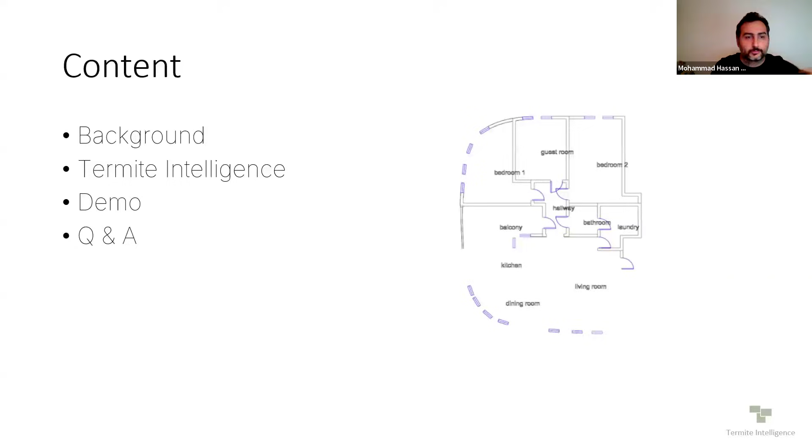I'm very happy to be here, it's a real pleasure to be part of this webinar. As I mentioned, the content goes through all these topics, so I'll start with who I am.

I'm a former computational designer and researcher. I started computational design during my master's degree, and I was working remotely with Houston and Cornell University. After a while, I became a computational designer and project director in the research and development group of a panel company in Tehran. Then I started my PhD in differential geometry and AI at Innsbruck University, which I'm now finalizing.

Termite was always alongside these paths. It started back in 2020, when we released the plugin for Grasshopper and held one workshop in CAADRIA. We got a lot of traction from the community, seeing that automation in layout generation is very interesting, not only for research and academia, but also for industry and for architects looking for a solution to the problem of repetitive work.

In 2022, we started more advanced technology development, separating the engine of Termite from the CAD software so it could become a hub connected to any software. We had an MVP release in 2023, got feedback from the community and some users, and had the chance to present our software at the Startup World Cup in Austria, where we were one of the finalists.

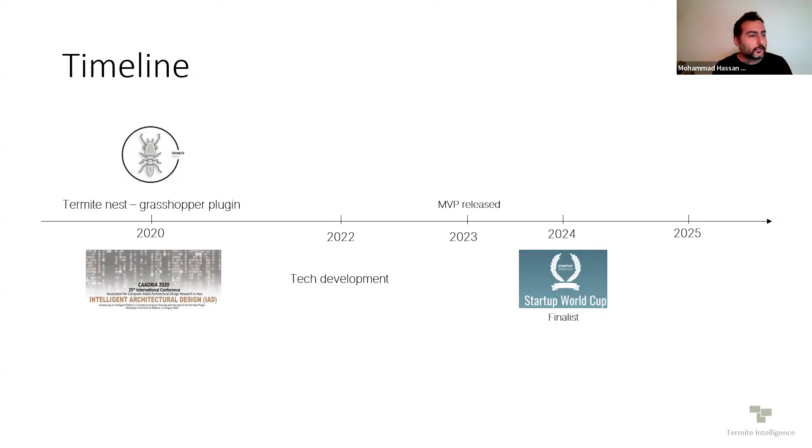Over this whole journey, we learned a lot from the community and tried to incorporate as much feedback as we could into the product. Now we have a dashboard powered by the AI engine we developed, which generates the layout and connects to Revit and Rhino. At the moment, it supports Rhino, Revit, and Grasshopper.

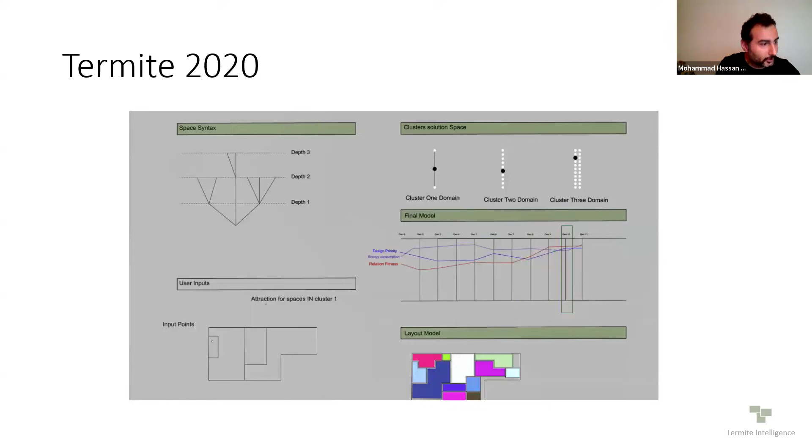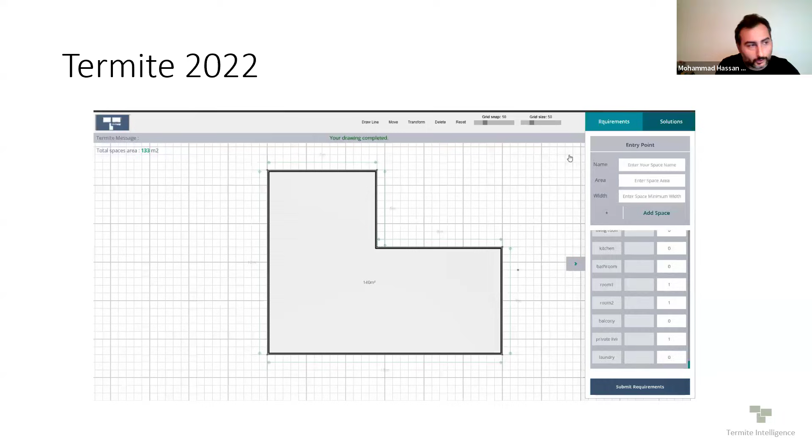Termite in 2020 was quite basic, working inside Rhino with Grasshopper. In 2022, we developed a small web app—it wasn't actually that small, but small compared to what we were aiming for. The issue was syncing with Rhino, since it was independent, making the connection between the CAD software a bit hard for users. We then started modifying and updating it, and now we have the dashboard that syncs with Rhino and Revit in real time.

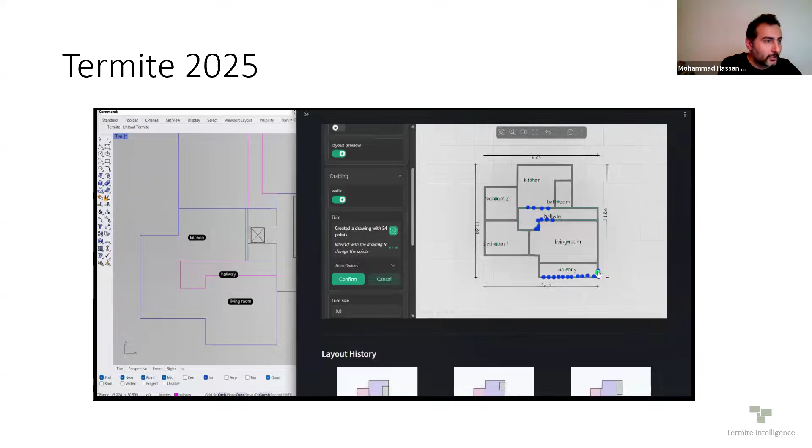You can update any data, and then you can create layouts and convert it to the plan and export it back. So that's the status that we have.

From food4Rhino, since 2020, we've had more than 6,000 downloads. We had a lot of great names from companies and users on the list, and we were very happy to see that the plugin has this traction rate, and how people are looking to have tools like that in their workflow.

From mid-October, when we had the first release of the new dashboard, in one of the webinars we got more than 200 on the waiting list. That is increasing exponentially, and we are very happy with that actually.

We'd love to expand at a faster rate so we can respond to all of them in shorter time. But we have started onboarding 5 companies at the moment, and we have a batch selection from the waiting list, and we will contact them as soon as we have the free resources to start onboarding.

But you can just go into our website and book a demo. You will receive automatically a meeting date, and then we will be happy to have a meeting with you, understand your needs, and then based on that, deliver the product to you.

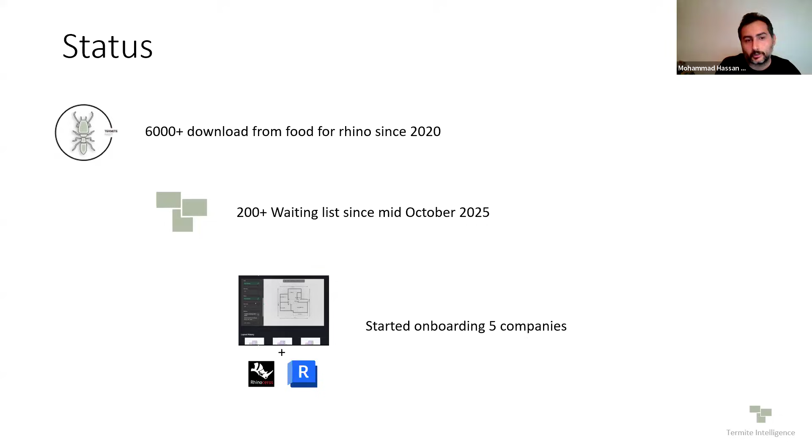The Termite dashboard at the moment has a workflow that's a session-based web app, and at the moment we have one session ready for delivery. I'll talk about the new sessions and what we have as a surprise for 2026 at the end of this webinar. This session works basically as an assistant that supports you in your design.

No matter if you're using Revit, Rhino, or Grasshopper, you can generate the boundary of the building. You use the template of the physical programs that you can sync with the dashboard, which I'm going to show you how it works. Then you decide where to put what space, and Termite converts that decision into a layout shape. Within the 3D viewer, you can convert it to the plan and then export it as a DWG, or sync it with Revit as a BIM model, or have an IFC export.

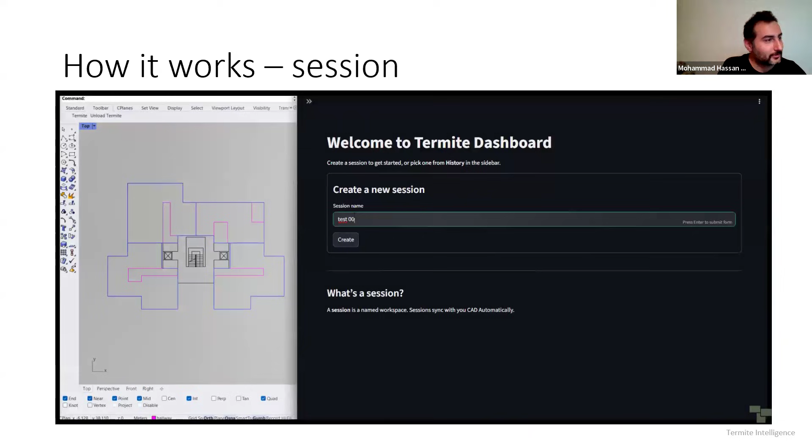Shortening the talk now, showing more about how it works. As I mentioned, the session is some sort of a workspace that you have. The first step in any session is the physical program.

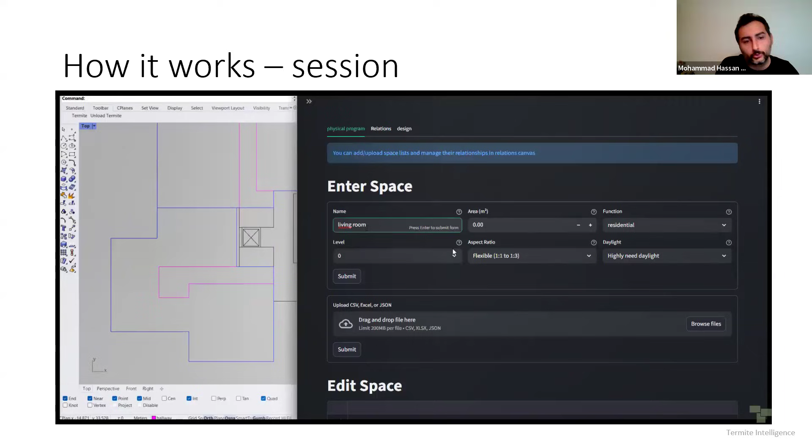Here you can see that you can have any type of spaces with any name. So it's actually your own data set that you create with Termite, and it's unique to yourself. Then you can save it and use it later, and you can expand it within your projects.

So you don't have to start from scratch every time. You can always have a huge list of spaces, but select or filter them for different sessions - that's possible, of course, as I'm going to show you in the live demo.

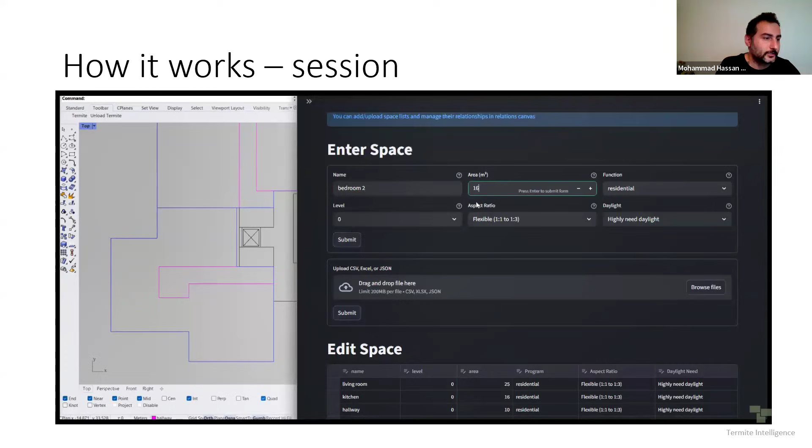The functions or programs that we have here are residential, office, retail, hospital, anything. We have a category of 30 programs at the moment, and how it works is basically this is the data that shapes the space. Termite is object-oriented based on the spaces.

When you're building your data set of spaces, it's going to place the spaces with the geometry that represents your own preferences as much as possible. Basically, you're not dependent on any previous data set of the building layout, but you're building your own data set and growing it through the interaction with Termite.

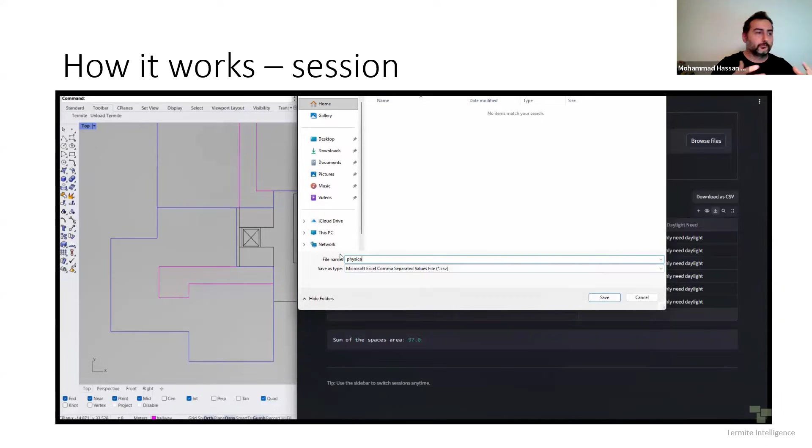As I mentioned, you just can save the template and use it later. Now I'm going to dive into the live demo to see how these sessions work and how you can start generating some spaces and how you can modify it.

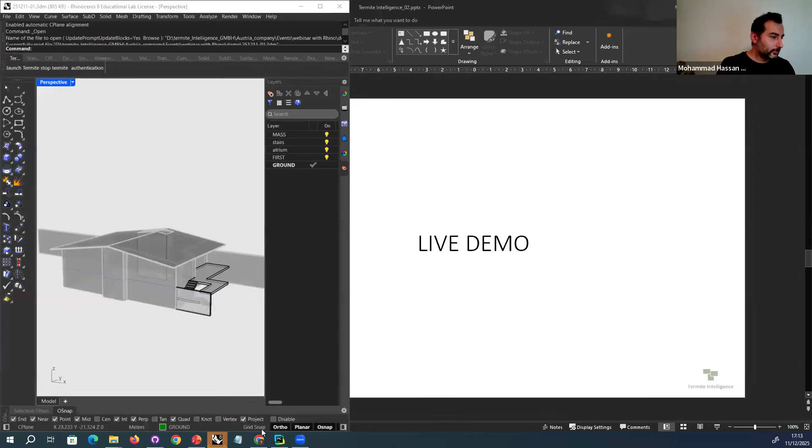So I go to my Rhino file, the first file here with my Termite dashboard beside. This example is a small house that we have here. I turn off this mass - I just tried to make it a bit interesting, a little challenging - there's an atrium here, so there's no possibility to have light here, for example. So I'm going to hide the mass, and I have two floors here.

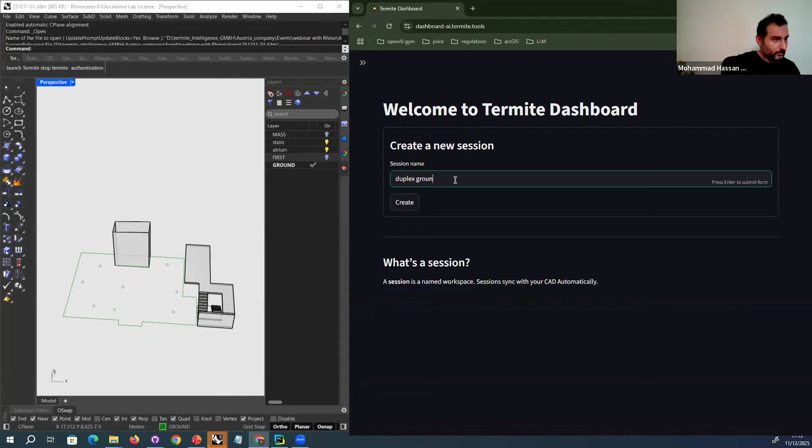What I'm going to do is use Termite to generate the layout here on the ground floor. To start that, I start with a session. I write it down as 'duplex ground'.

I create a session here, so I'm in the session of the duplex ground. I call Termite within Rhino, and then it opens up the plugin form. So it goes here - I bring it back to window number one.

So how it syncs, how Termite can be connected with your Rhino or Revit is through your token and your session. The token is something that we will give you, and through installation you will initialize it, and Termite will remember it. You will always be connected to Termite through that token. Then you use the session ID.

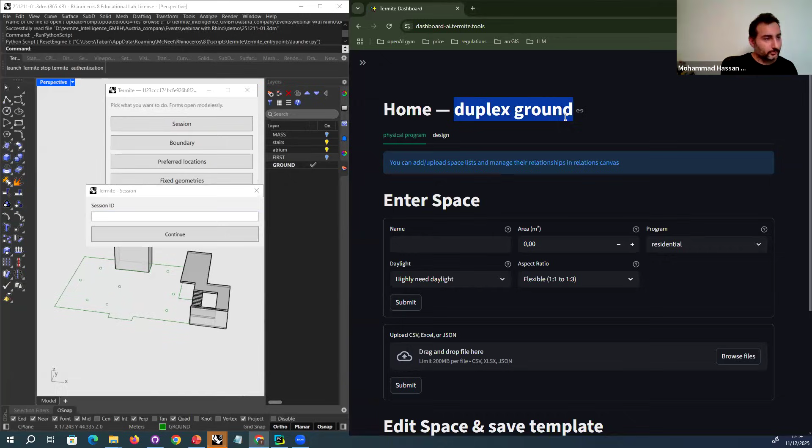So here I'm using the duplex ground, so I give it the session name. Here you can see I have no spaces. I'm using the data that I have archived for myself, and it's going to read the data. You can see the list of spaces with their size, programs, and other attributes related to aspect ratio, daylight, and programs.

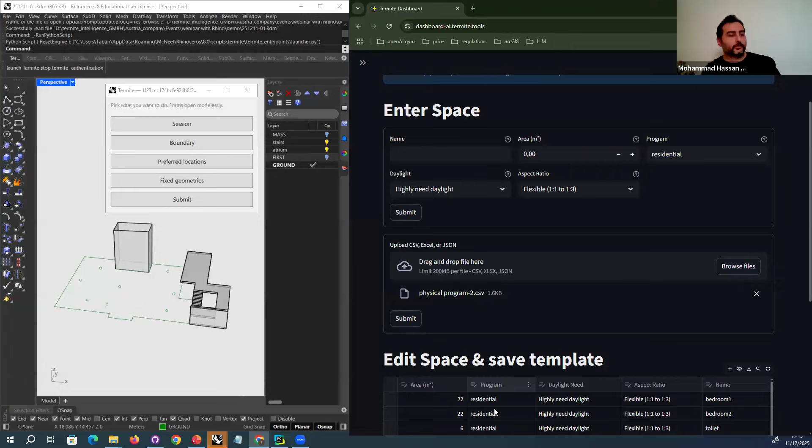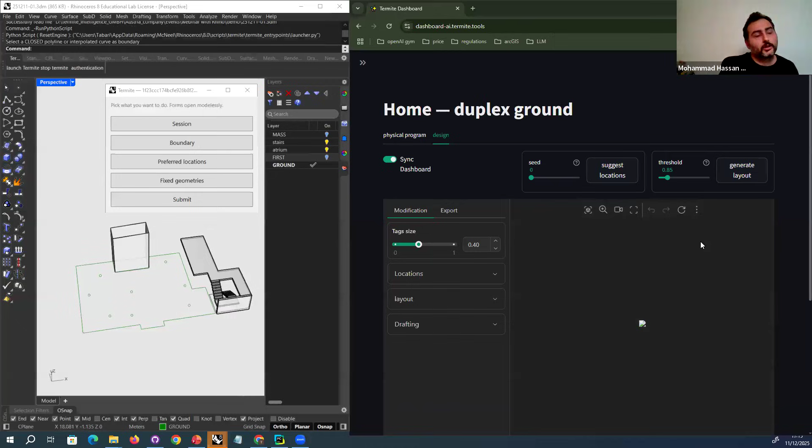So then I'm ready to start. I have all my spaces listed and Termite reads them. What is needed is to start syncing Termite with the dashboard and Rhino. I start with syncing the boundary. I select the boundary, and then it will be presented here in my 3D viewer of the dashboard.

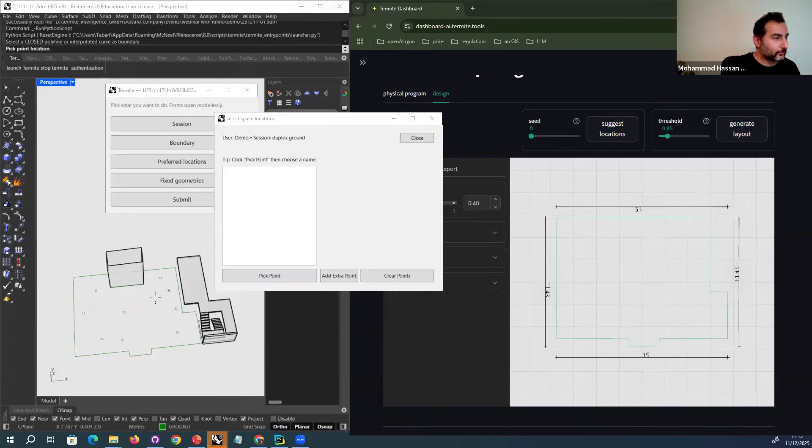Right here, the next step is to set the preferences of the location. I was trying a lot of different things today, so I'll just set a template for myself to present here. What I'm doing is opening up this space selection, and I pick a point to select a location that I'm looking for.

Termite also understands the Z level, both in Rhino and Revit. So if you have multiple levels, you just need to put the points there, and it automatically detects the level for you and generates everything at that specific level.

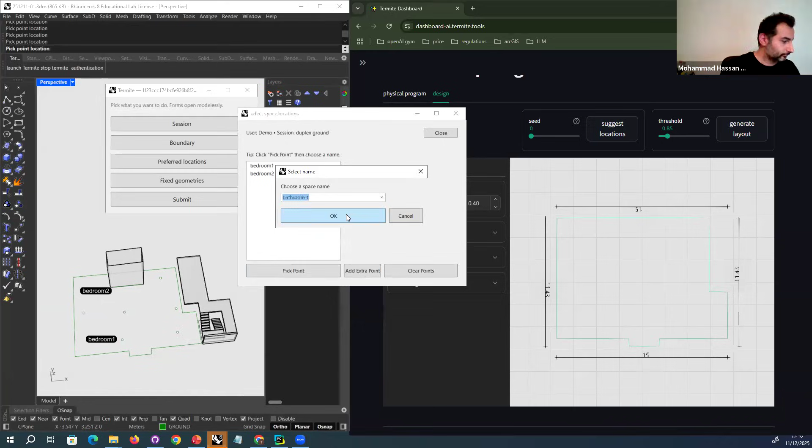So then I put bedroom 1 here, or bedroom 2, no difference. Then I connect this one here, bedroom 1. Then I need the bathroom between these two, for example. I'm putting bathroom 1, then there is a bath.

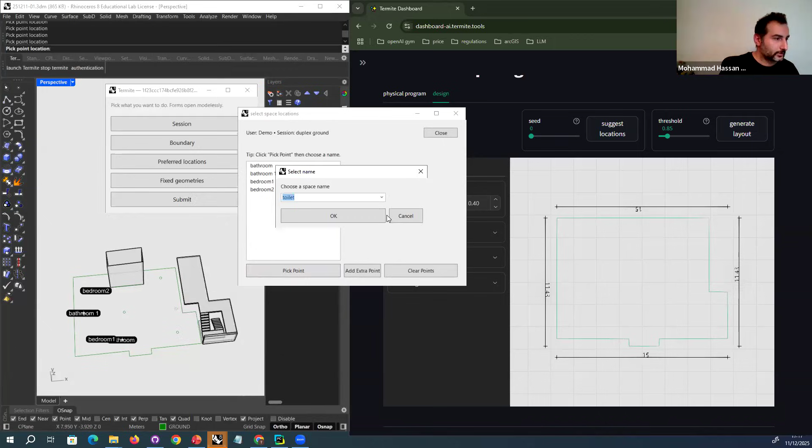You can see I have a list of a lot of spaces here, but I can select and filter them. It's not necessary to use all of them, so you can just have some that you're going to use for this specific plan. Then I'm going to add a small storage here. Next would be family lounge and the living room in the center.

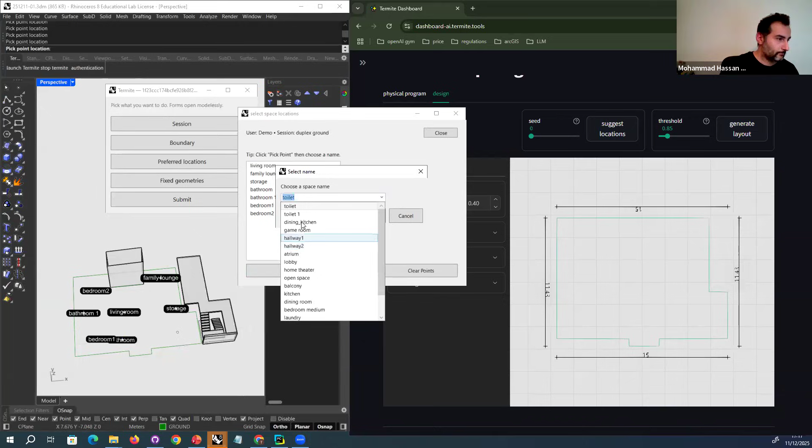And then I add dining kitchen, that's what I'm putting here. Because I want this atrium to be fixed for multiple levels, both levels must have this place open, and Termite should not enter that place. So I close this part and use fixed geometry, telling Termite this is the fixed geometry it should not touch, and I give it the name atrium.

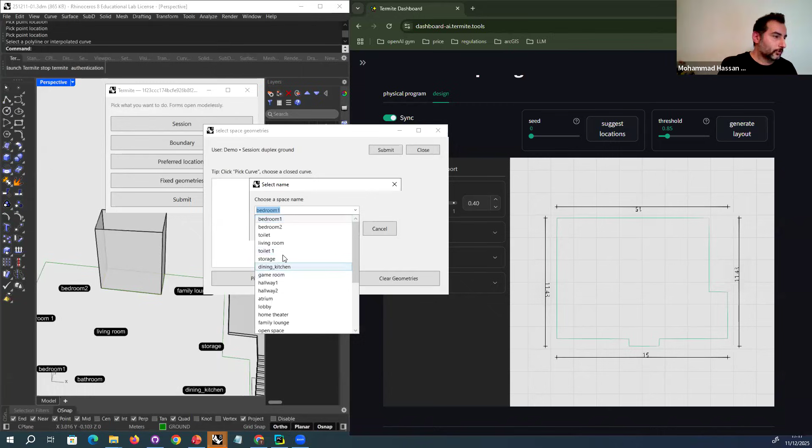I press OK and then submit, and everything will be presented now in my dashboard. Once I have all the data here, I just press generate layout, and the layout is generated. So the process is super fast from generation to output.

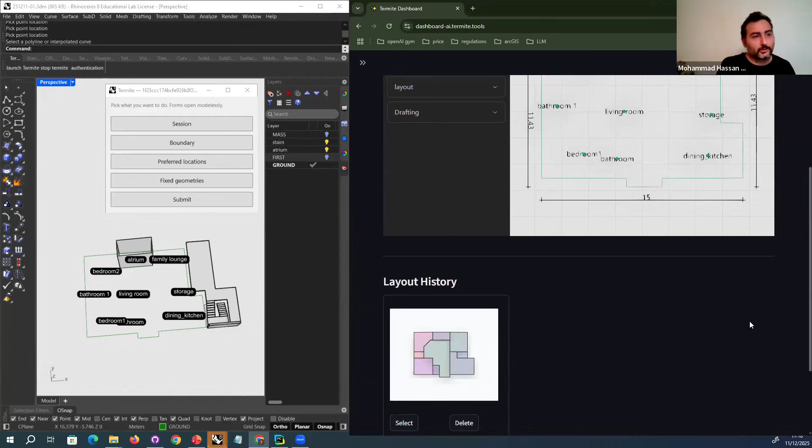You can of course modify the results, modify the position, change the names, add hallways, and then generate multiple new layouts. It's just let's say playtime that you'll have with Termite. Once you're happy, I'll show you some other examples that we had.

Once I have the output, I can select it and add walls to it, and then start drafting it easily. I can trim, for example, I don't want to have walls here, so I trim them. I can also trim these parts here, just keep a bit of the wall, and it trims the wall for me.

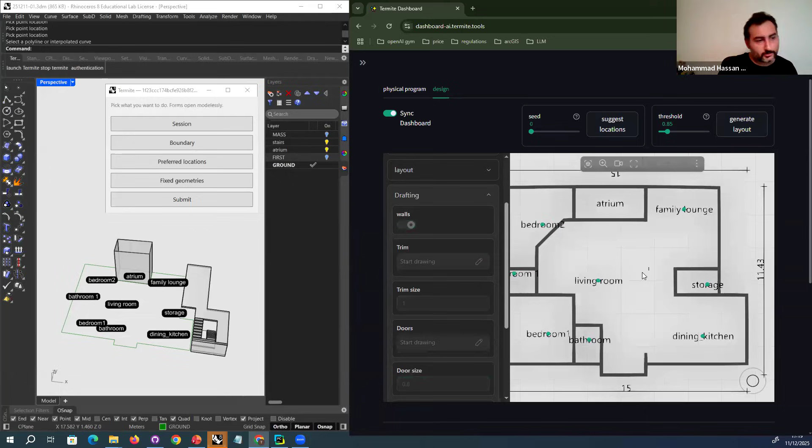If there are some sort of small tiny glitches, you can just modify it. And then, oh, here also if you miss something, you can just add an additional one. If you want to cut this, but I want to keep this, it's fine for me.

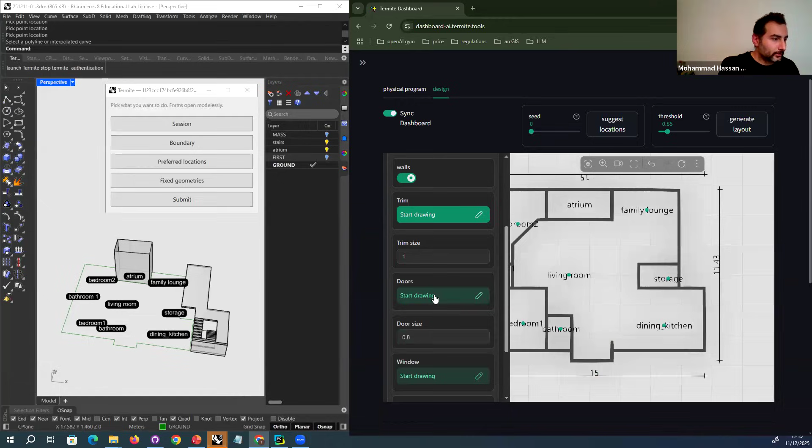So that's it, and then I come to doors. I can add a door here, and one for the bedroom here, one for the bedroom here, and one from the inside to this bedroom, and then one for the storage and one for the entrance, for example, here. Then I press OK, and everything is set up there.

I can also see the layouts and tags of them as well. Once I'm happy, I'm just exporting that. At the moment for Rhino we have the export of the DWG, and you can just import it into your Rhino, and everything will be presented easily with the walls, doors, and everything in different predefined layers. Basically, that's how you can add it.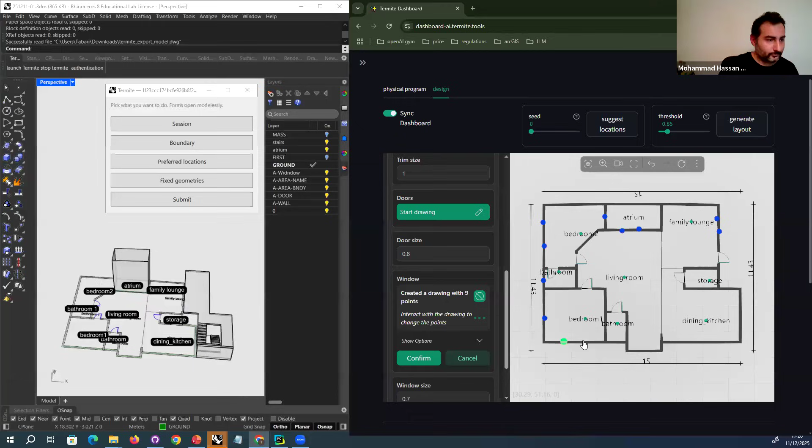Then, oh, I just forgot to add some windows. I can add some window here, for example, here. I can add it to the atrium, and here I can add some more. And then I can export it again.

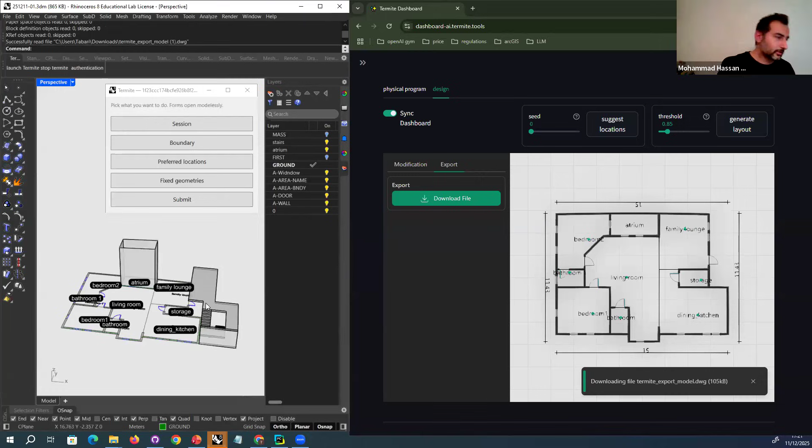So now windows are added. That's basically the whole process: how you sync Termite, how you generate, and then how you can modify and add walls and doors. And so here I have a session prepared before for the duplex first floor.

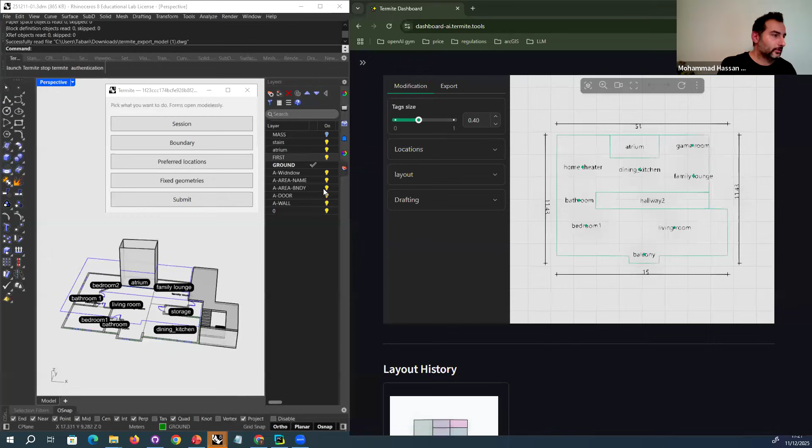And when I go there, I can see the hallway I added. So here, if I go to the first layer, I turned off the ground floor, and I can go to the preferred location and clear those annotations, so I don't want to see them anymore.

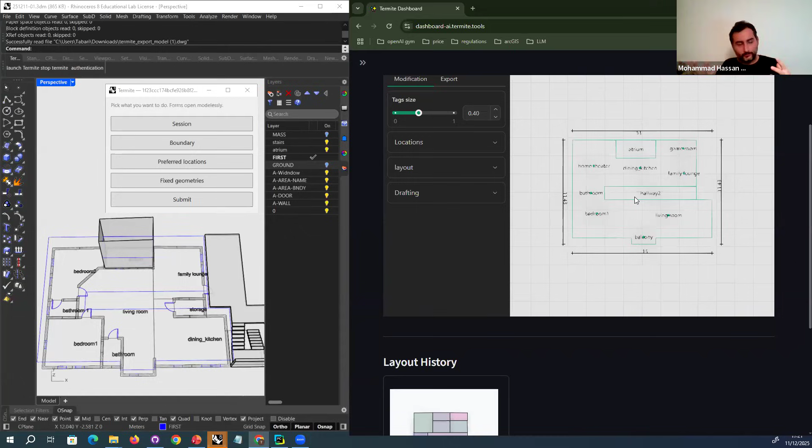Here I can see that this is my first floor, and this one has a hallway. A hallway is something that you can define the access with, and it's helpful when you want to have some control over the design, to see how it affects the circulation of the space and how the space arrangement will be updated.

One other thing is that you may have multiple layouts prepared, and you want to pass it to a colleague or friend to update and add layouts, so you can share a session. You can share a session, and then start to modify it as a team together. It's also possible. As an example, I have it here.

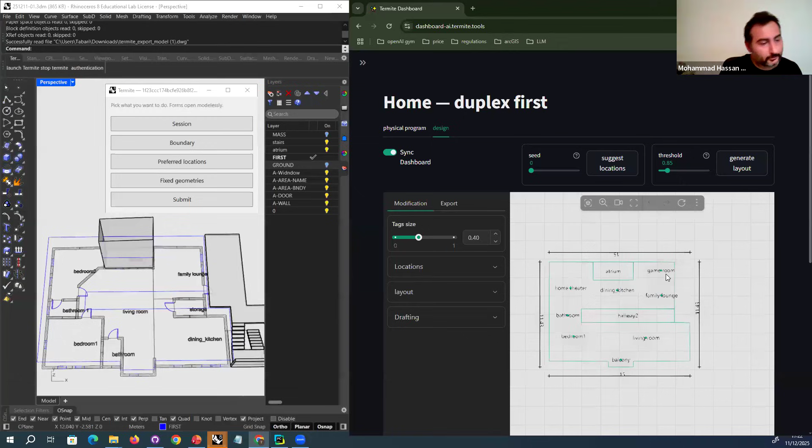I just import the values for this one, and then I can get the outputs, everything prepared, and then I can just export it and import it into my Rhino. So there we are. We have both levels prepared now, and it's all generated. So this is the DWG file.

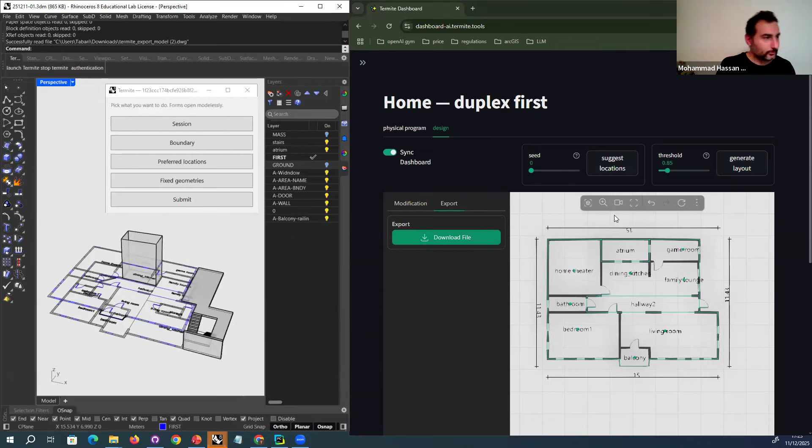One other example I want to show you is an example with the home complex that we have. So I close the plugin here. I come to this one. So here we have a little bit more challenging geometry.

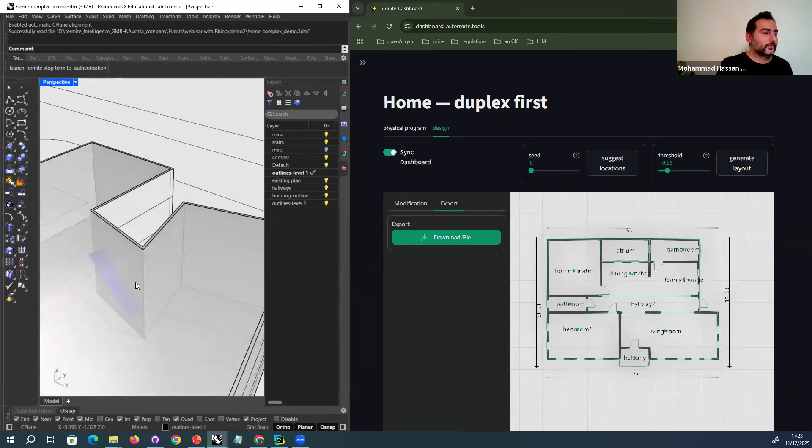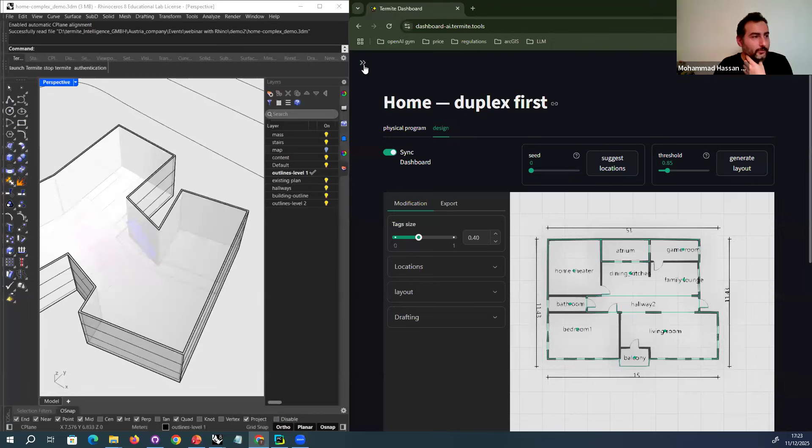This is a home complex that has multiple levels, and also inside it has a duplex connected by an interior staircase that exists inside. Because we have a customized physical program, it's possible to have variations of the spaces. We are not limited to a certain type of building or physical program - you can have your own, as much as you want.

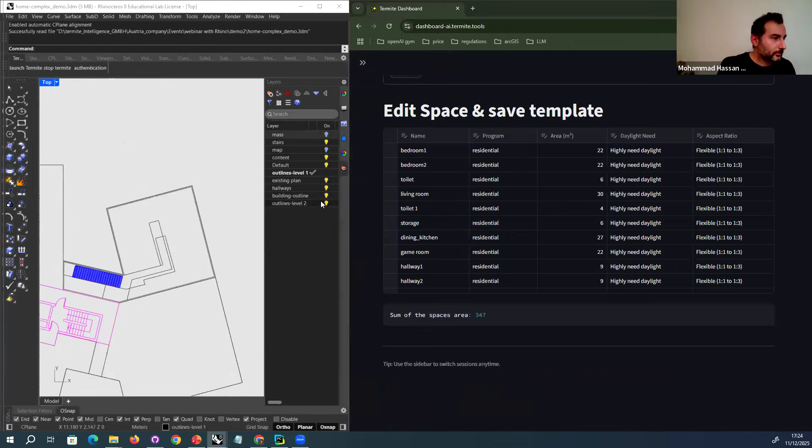So I just change it to level 1 and come here. I can show you my layout for this one. I can just turn off the mass, and then I come here and you can see it. This is level 1.

I just select it, and then I can have walls. And if you want, you can also update it, not just in Rhino. Once you have it synced with your Termite dashboard, you can update the position of the spaces here as well. So I turn on the location tags, and then I just, for example, move this bathroom from here to here and confirm. Then I can just hide walls and press generate.

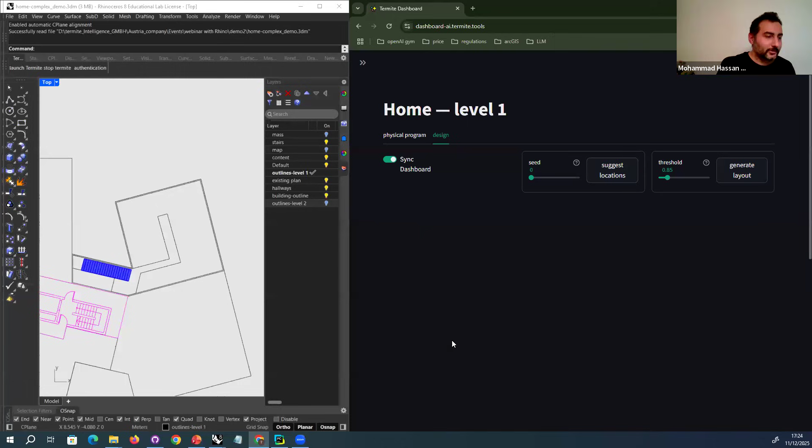Oh, I just forgot to update the location first. So I have to update the locations, then Termite loads it, and then it's possible to generate new data. So now you can see it's updated, the position is changed. So you can basically update anything.

We can modify the hallways, you can update even the size of the spaces, coming back from the physical program. So it's back and forth - Termite is always synced and linked. You can update anything.

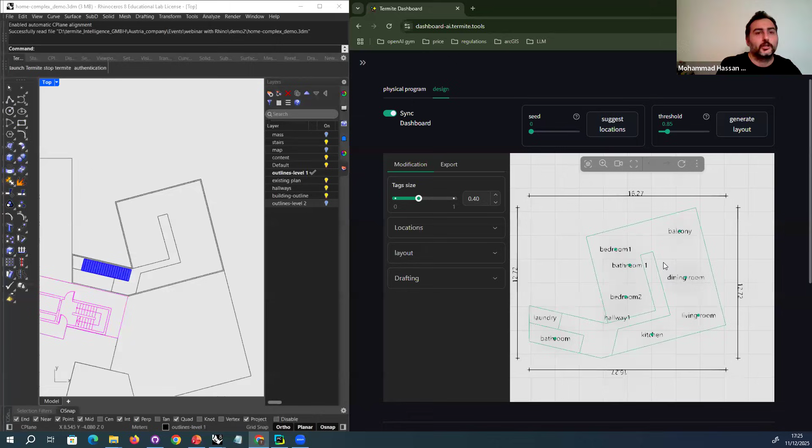And then I have the file of this plan also, because one of the parts that we already learned from the users was that they wanted to have the possibility to update the interior of the space, to have intervention. So it's not just one thing that is generated and they cannot update the walls or trim it or add something, but they want it to be fast and easy.

That's why we were thinking about preparing easy drafting tools that you can use. And of course, we are frequently updating that, and we will be very happy to hear your expectations about that - how would you think it would be better? We also have some news about how we will update it that I'm going to talk about later.

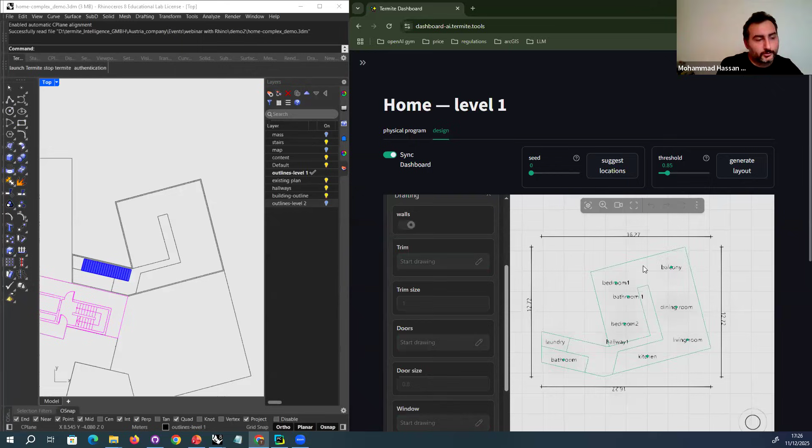So then I just use the level 1 file, which will be integrated in the dashboard, and then that's it. I have it, and I can just export it now.

And I put it here and import it. That's it, I have this here in this level. Then it comes to level 2.

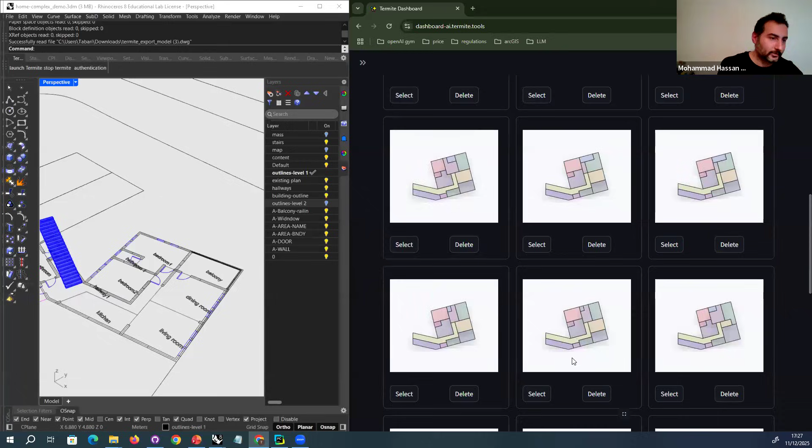For level 2, we had a bit more exploration. We started with a long hallway and had a lower number of spaces - a living room and an open space looking down to the floor below. But we updated that, explored some variations, and came to the part where we fit maybe 3 bedrooms inside. If you look at the names, you can see variations in types of spaces - home theater, bedrooms, or whatever you want to have. So it's possible to have your own physical program, of course.

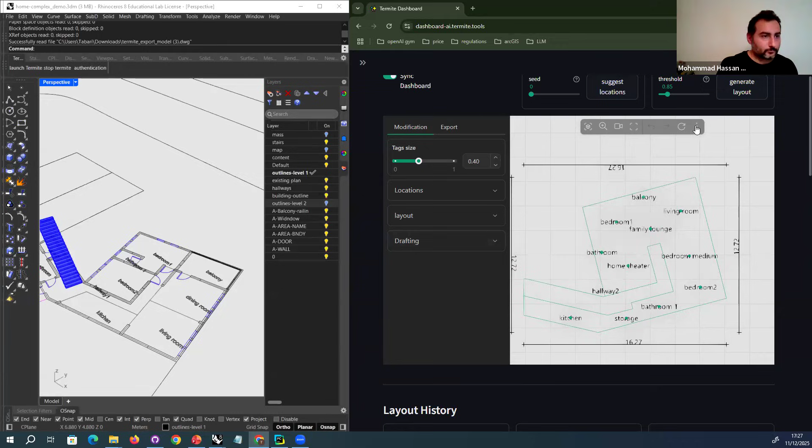And I'm going to show you also this one, for example, that converts it and then I can export and add this one as well.

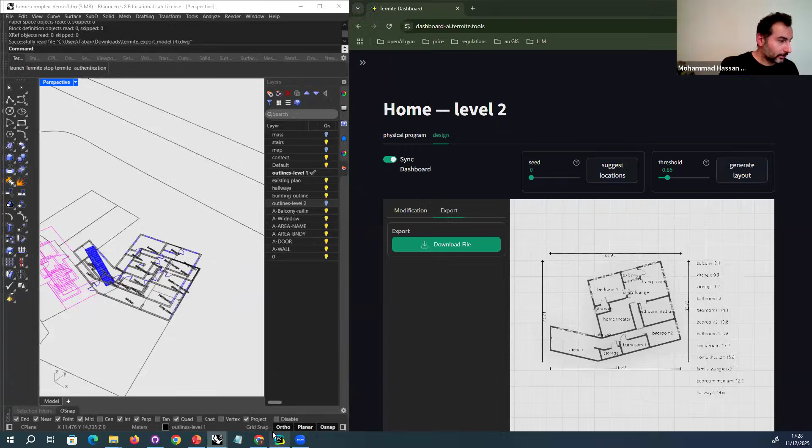As I mentioned, it automatically detects the level and comes to the position it must be, so you don't need to worry about it. It always considers the axis as the mid of the wall and offsets it around it. And it's possible - if I go back to the presentation here, I can continue on.

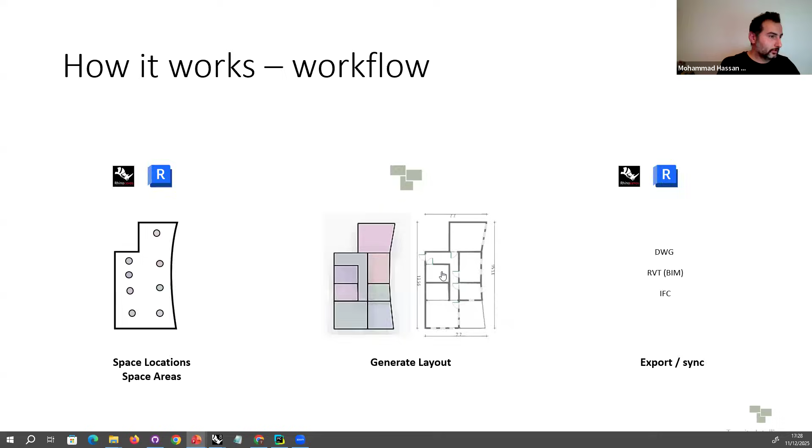Let's start from the beginning. So it's possible to have it even in arc shape. For example, we had a 9-unit apartment here, and it's possible to have it in a rotated angle, in different orientation, or it can be arc shape or organic geometry - Termite is flexible in that sense.

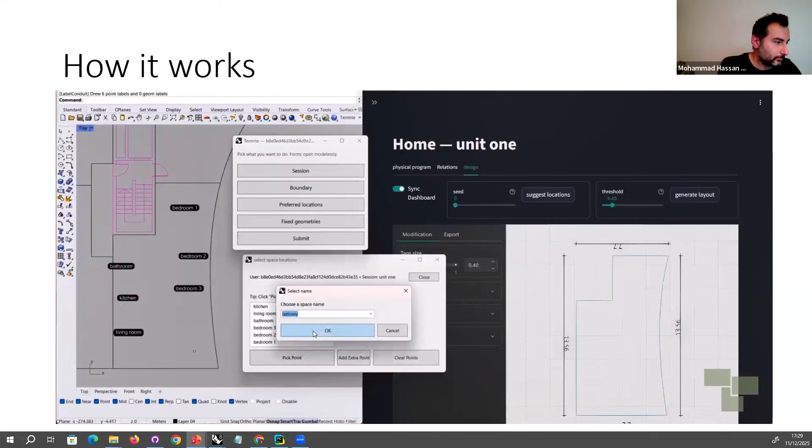We can start and generate multiple layouts and easily speed up the process. In this test, we could generate all 9 units in a very quick time - I'd say less than 40 minutes. We also explored some variations, double-checked some things sometimes, and then came back again.

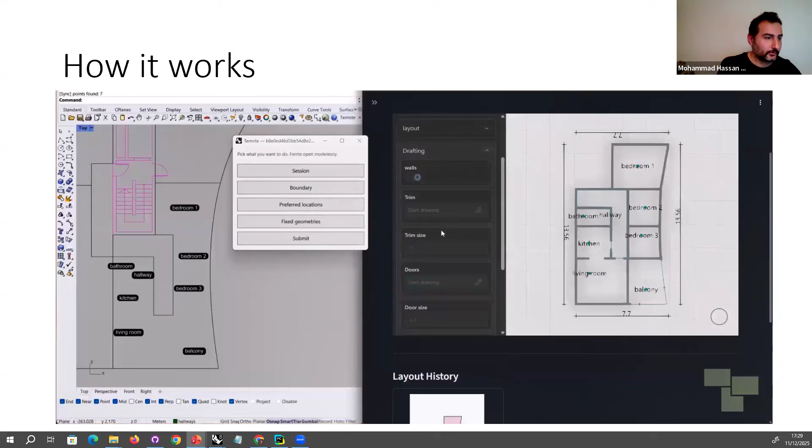So as you can see, it's possible to have it multiple times - you can update everything, you can have drafting. Maybe you've seen this video - it's the one we already presented on LinkedIn, for advertisement we were sharing, showing that it's possible for Termite now to be updated with organic shapes as well. Today I just presented the orientation and levels as well.

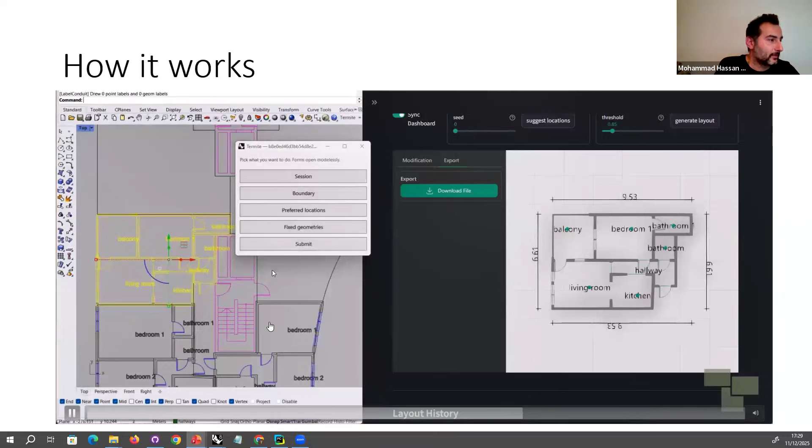That is the newest feature that we had. We are going to add it to the upcoming releases for the early users. And that's how Termite works, actually.

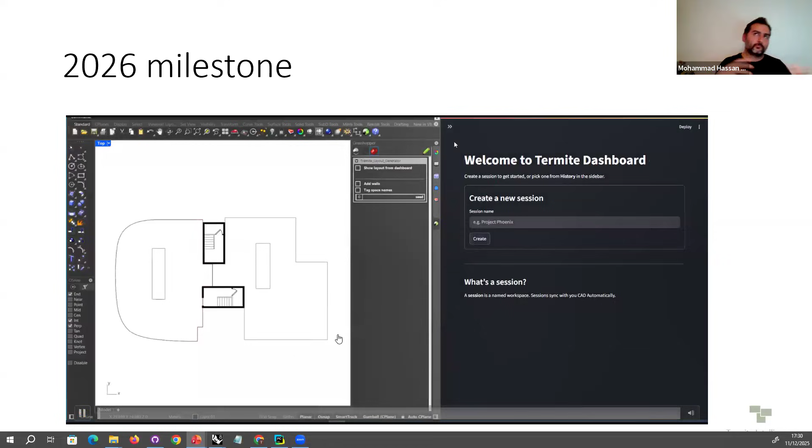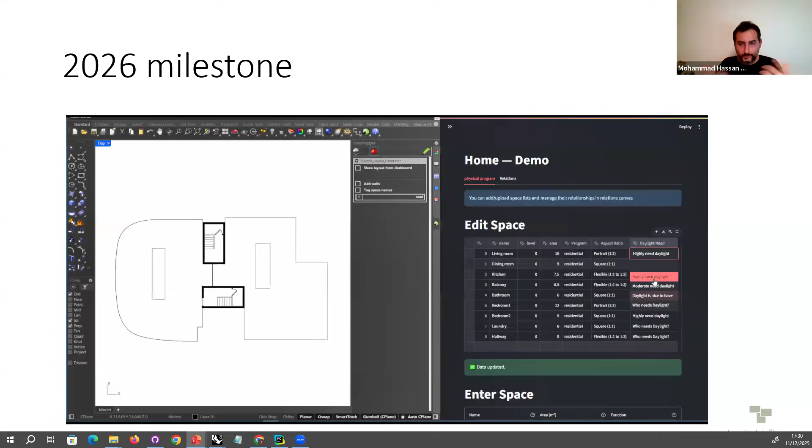What I'm going to talk about next is the updates and milestones we have in mind that we're currently working on. One of them is that we're challenging ourselves on how we can have some sort of LLM model - basically we're going to reinforce the physical program, because we also heard a lot from users that they want building regulation constraints more integrated with the physical program.

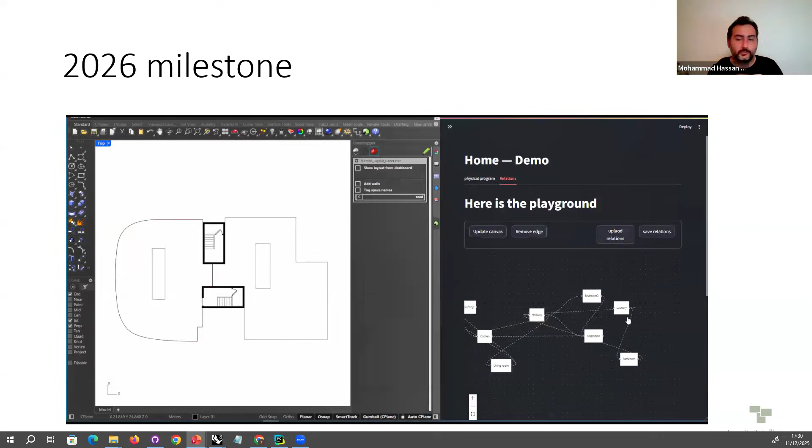So one of the things is that we are going to add this into your physical program. Once you're creating your physical program, you can add some limitations of widths, for example axes, lines, some sort of regulation about distances that will be integrated with your physical program. Termite will be updated to that.

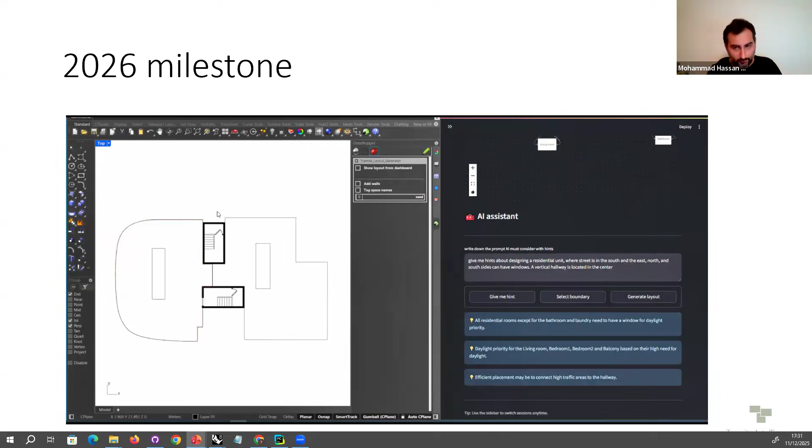Another thing is an AI assistant connected to your dashboard that you can write down and connect with. And this relation canvas that you see here is something that you can use to identify the relation of the spaces within your physical program. So Termite not only reads your positioning of the location, it can also predict it for you based on your interaction.

So over your interaction, Termite starts to create more adapted layouts to your own preferences. So this is what we are working on.

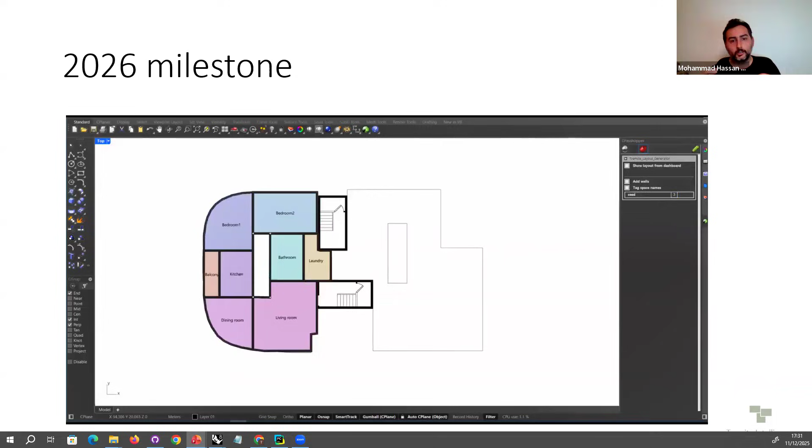This is a huge milestone for us, and we have planned it and are working on it - so that you can have a fully customized AI assistant to your workflow. So you have your own data set of physical program, and your own AI that through interaction with you, learns from you and then continues with you. That's the aim of Termite.

From day one, we had this in mind, and we are now working on this process to reach that. So this is one of the short demos of that.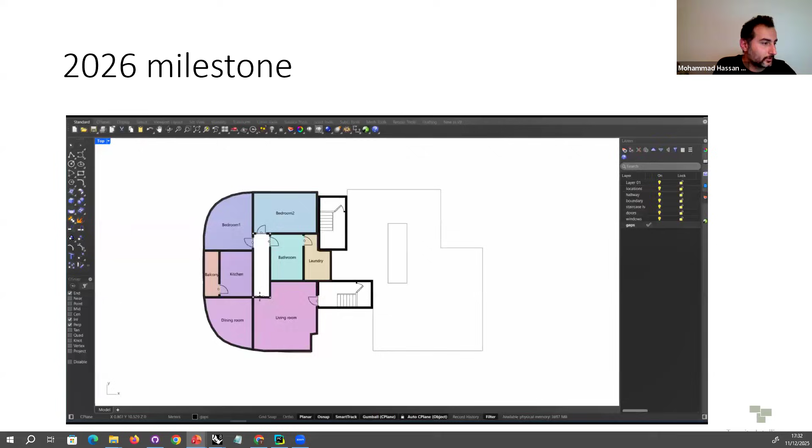And of course, Revit is something we're working on. I'm showing you now that the first part of the Revit integration is completed - Termite is now possible to be synced with Revit as well. So you can start with rooms as static spaces, and Termite syncs automatically with that.

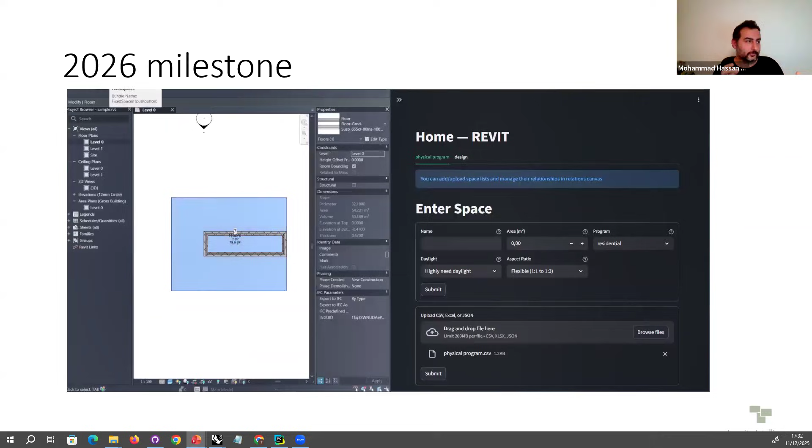And one of the other things is that you can maybe generate your concept with Rhino, have some initial forms of the building, separate it and use Termite for the layout generation, and then sync it with your Revit.

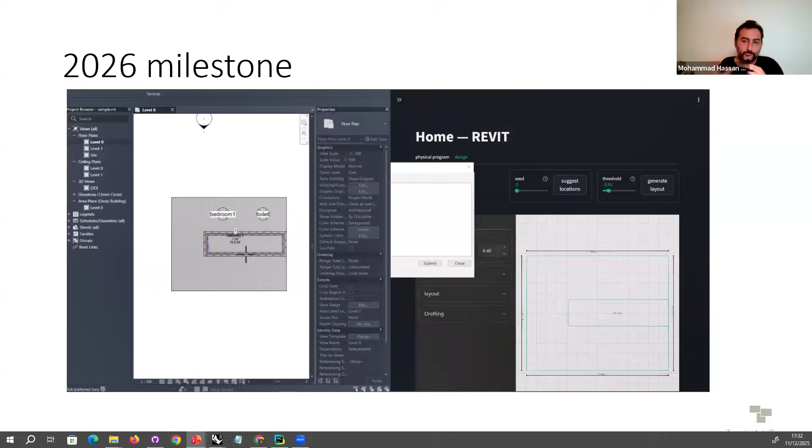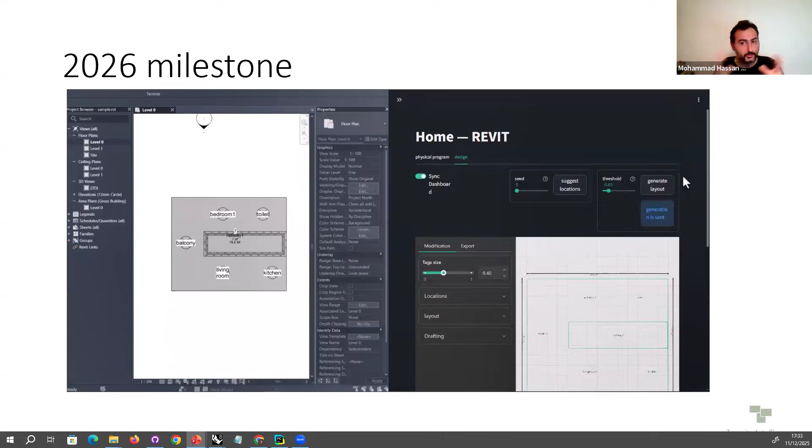That part will be ready soon, that we're working on. Termite not only reads the geometry of the Revit to be connected and generate the layout, it also uses the native BIM information, the native BIM models or Revit families or types from Revit, and converts what you are drafting into a 3D BIM model back in your Revit.

That's something you're providing, as I mentioned. This is the setting you add in Revit, where you can set up the type of walls, type of windows, type of doors, and the wall height. Termite converts the layout generated into the full BIM model back into your Revit.

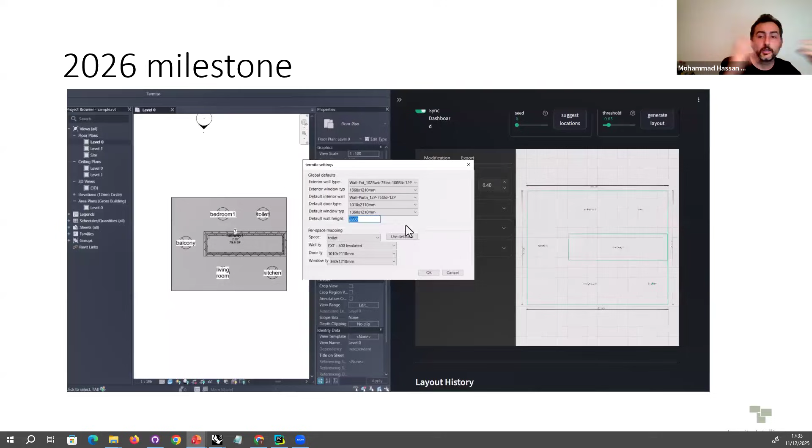That's what we are working on, and I'm going to present it and announce it soon, in January 2026, and it will be shipped to our early users as well.

So the benefit we're looking for is to provide an interactive tool where the design control is still yours. As an architect, you control the design. You have ownership of the creativity to place the spaces and navigate it how you want.

Our AI is just something that comes as an assistant beside you, to realize what you're thinking about and show it to you, very fast, converting it into the plan and showing it as a model in your CAD software.

What we're looking for is to eliminate the black boxes. It's not about writing a prompt and getting something similar to what you were thinking of - it's about what you want to have, and Termite creates it for you.

Termite has a very fantastic team who helped us form Termite, from 2020 until now.

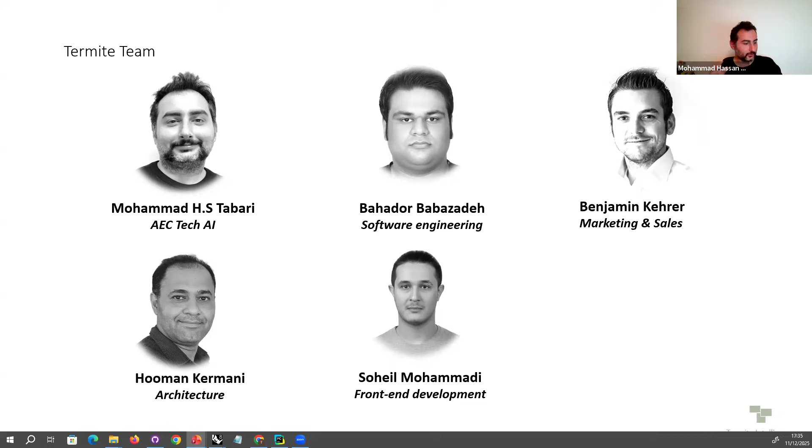I'm almost finished, I would say - it was very fast forward, actually. So feel free to book a demo and get in contact with us. We will be more than happy to hear your comments, your feedback, your expectations from what you are looking to have in your workflow as an architect, and what we can provide for you. So, that's it. Thank you.

Excellent, Mohammad. Thank you, many thanks. Great presentation and great technology you've been adding to Rhino and Grasshopper. There is very nice feedback from our users, and a few questions.

First question: for US architects, does it support the imperial system? Imperial system unit, okay.

Termite by default works with the metric system, meters. It's of course possible to consider imperial units but we didn't try it actually, but we can test it. If you have interest in Termite, we'll be happy to do a demo with one of your case studies, and then you can figure it out. But there would be no problem, I would say, because we are using units that scale.